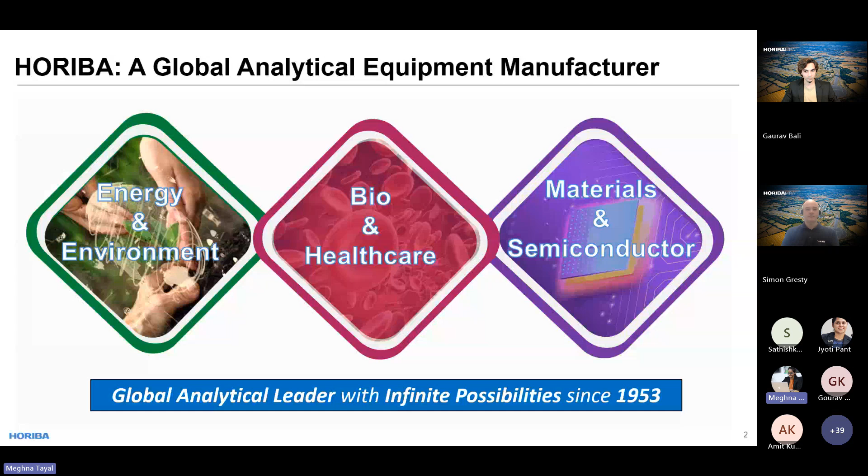The HORIBA Group, a global analytical leader since 1953, serving the markets of energy and environment, bio and healthcare, materials and semiconductor. We are into R&D, manufacturing, sales, and services. Our head office is in Kyoto, Japan, and Atsushi Horiba-san is the current chairman and group CEO.

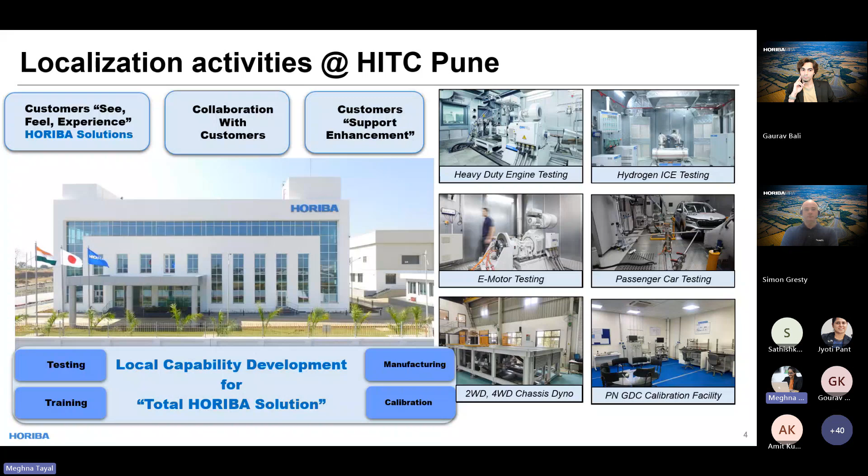Thanks, Meghna. Okay, I'll just start with sharing my screen. Hi everyone, I'm Gaurav. As Meghna said, I'm one of the chief engineers for functional safety at HORIBA MIRA. For the last 15 odd years I've been in the low carbon domain, predominantly vehicle lightweighting, functional safety, and system design. So I'll try and talk to you today about functional safety predominantly.

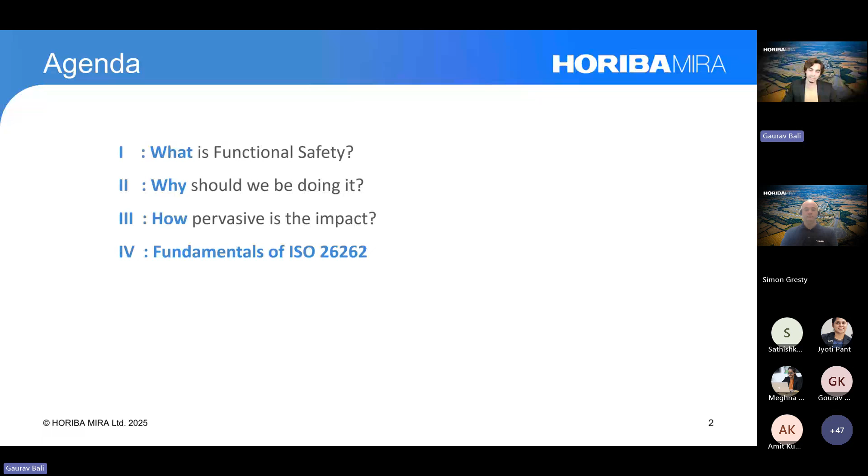So we'll start with what is functional safety, why should we be doing it, and how pervasive is the impact of doing it or potentially not doing it. Then we'll do a little bit of a technical deep dive into some of the basic fundamentals of 26262, which is the leading standard for functional safety. Then we'll try and do a live walkthrough of an example so that you have a technical takeaway from the session as well.

After that, I'll hand over to Simon, who'll talk to you more about our presence, what services we offer, and how we can help your business. Towards the end, we'll be happy to take questions and answers from around the table.

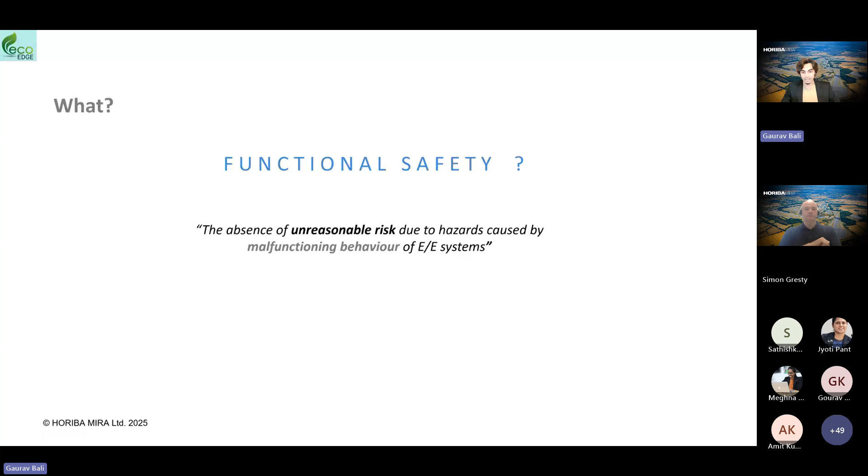So, what is functional safety? The strict or key definition used in the industry is the absence of unreasonable risk due to hazards caused by malfunctioning behaviors of EE systems. Now I know that's a mouthful, but the idea is to highlight unreasonable risk, because risk can never be completely eliminated. The moment we step out of our houses, there is risk. Even within our house, there is risk. Breathing, there is risk.

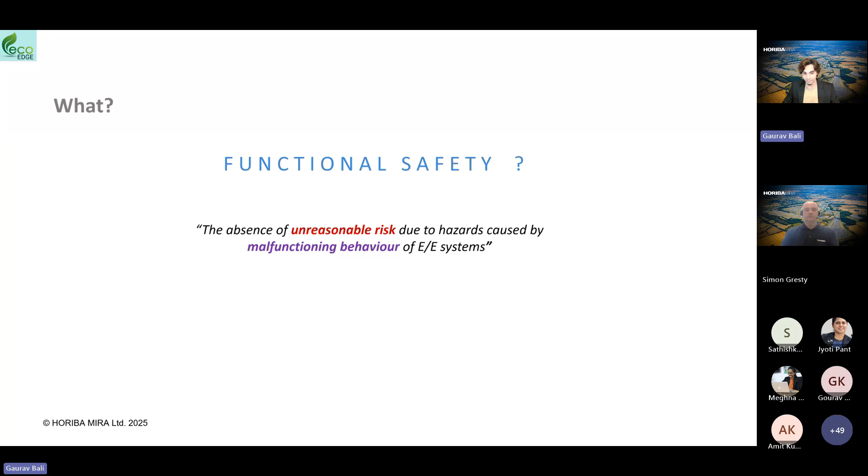So it's the absence of unreasonable risk that we're trying to design against, caused by malfunctioning behavior. What we're trying to highlight is that functional safety's scope is about malfunctions or failures. If the design is just poor, that's not within the scope of functional safety - that's a different standard, a different discipline, called SOTIF, Safety of Intended Functionality. And the scope of 26262 is EE systems.

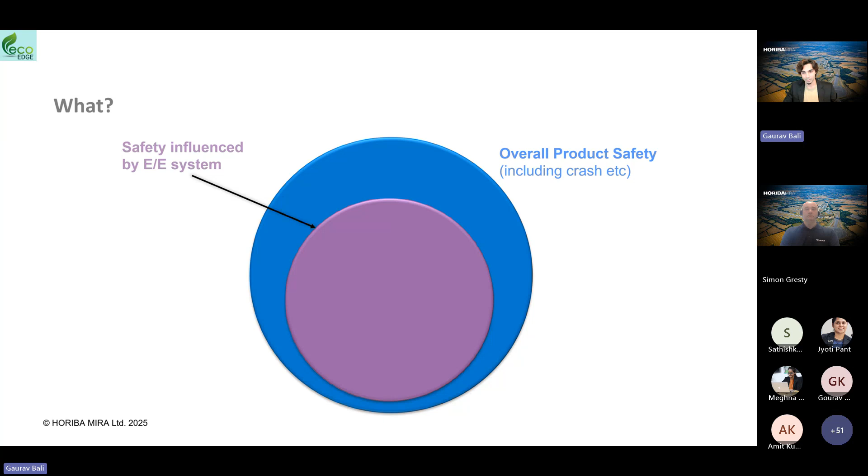So let's look at that a little bit more. If you imagine the overall product safety as this blue circle, it includes everything from crash safety, fire hazards, shocks. We want to highlight that there's a subset influenced by electrical and electronic systems. The blue set is perhaps things like a half shaft breaking - there's no electronic or electrical interaction in that. So that is in the blue circle, but not in the purple - it's outside the scope of 26262.

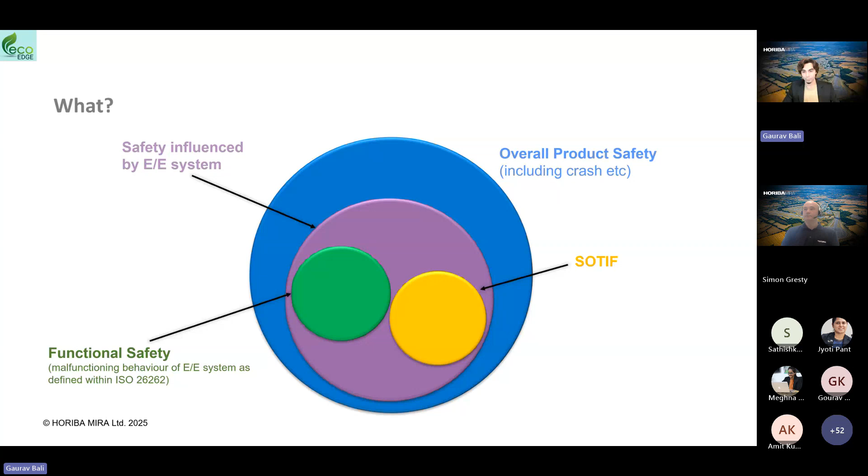Now within this purple circle, which covers all factors associated with electronic and electrical systems, there is a subset which is because of malfunctions. As said, there are poor design choices which could be made, and that's again outside the scope and covered by SOTIF. So functional safety really is a leading discipline, but a subset of your overall product safety. That's important to understand before we jump in.

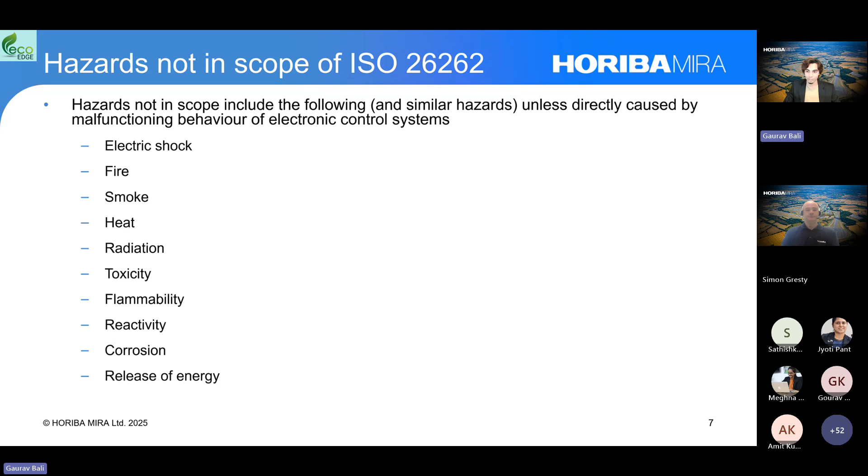So just to recap: things like electric shock, if a conductor is simply exposed, that's poor design - by definition, by design, not being safe - that is not covered by functional safety. If there was an ECU or electronic control system which exposed us to overheating of a component, which then caused fire, that would be within the scope. But a simple fire because of a short circuit, not influenced by an ECU or control system, is again outside the scope. Similarly, there are other technologies and hazards listed here which are outside the scope.

Now let's have a quick look at what the structure of the standard looks like. Many of you may have seen it, some of you may not have seen it. So 26262 edition 2 has 12 parts at the moment.

The first part is the vocabulary, which equips you to understand the various terminologies used through the standard. Part 2 is the overarching umbrella of management of functional safety. It involves things like procedures, safety culture within the organization, the templates you might have to develop for your various parts. So it's about how you manage the overall functional safety.

Then come parts 3 till 7, and this is where the more familiar engineering V cycle kicks in, right? So at the top of the V, we start at a concept phase. We move to the system level in part 4. Part 5 is hardware, part 6 is software, and part 7 comes back up towards commissioning, operation, and decommissioning as well.

Parts 8 till 11 are essentially supporting parts and some informative parts to better implement the principles of functional safety that we would have come across in the first few parts. And then part 12 is a new addition in 2018, to adapt what used to be just for passenger vehicles up to 3,500 kilos. Part 12 now adapts 26262 for motorcycles as well.

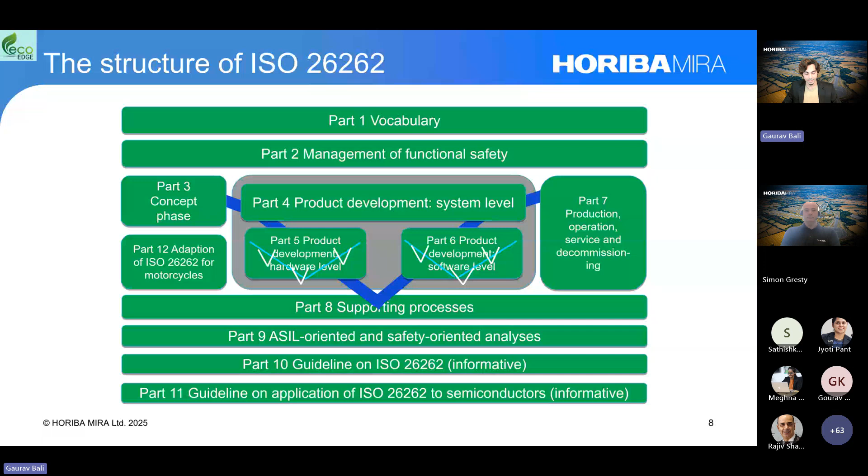26262 has built upon that and expanded a little bit. The first edition came out in 2011. We are currently on edition 2, which came out in 2018. The third edition is expected somewhere around '27 to '28.

If you start today, you would probably have edition 3 coming in, and you could update your design cycles to include principles of edition 3 as well. So it's a great time to start.

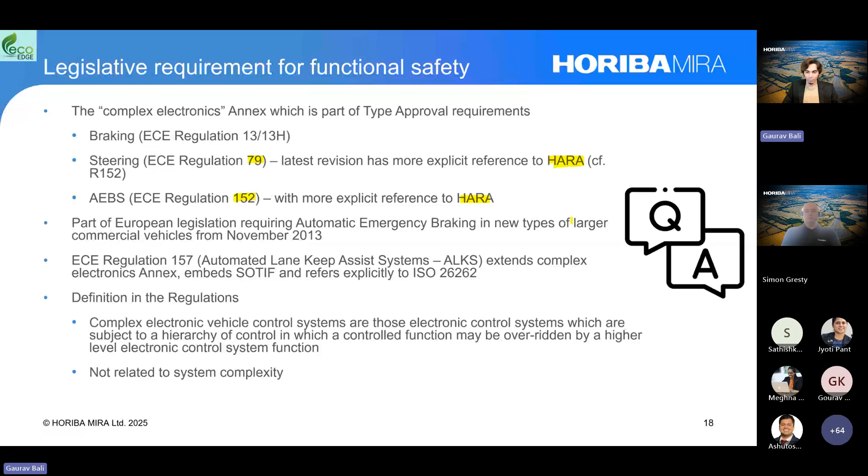So the next part of this seminar is, we've introduced functional safety. The next part is to give you a bit of a technical slice of what it is like to do functional safety and what the foundations of 26262 are.

Gaurav, just a quick interruption, sorry. The slides, I think, are lagging again. Some other people are facing the same thing. Yeah. Okay, I'll just go slower then.

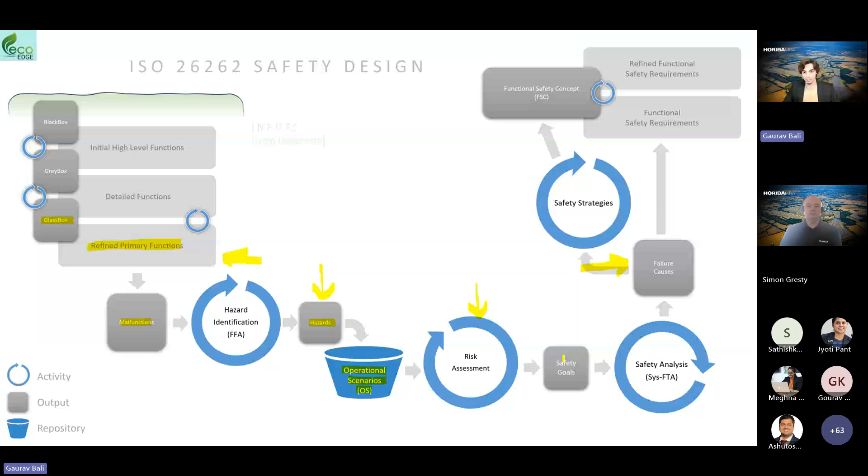The first is a set of inputs, which is covered by the item definition. The second is the problem space that is analyzed by the HARA, as well as safety analyses like fault tree analysis or the more familiar FMEAs. And then the final stage is the solution space, where we try to take all the failure causes we've identified and write requirements and come up with safety strategies to address or mitigate them.

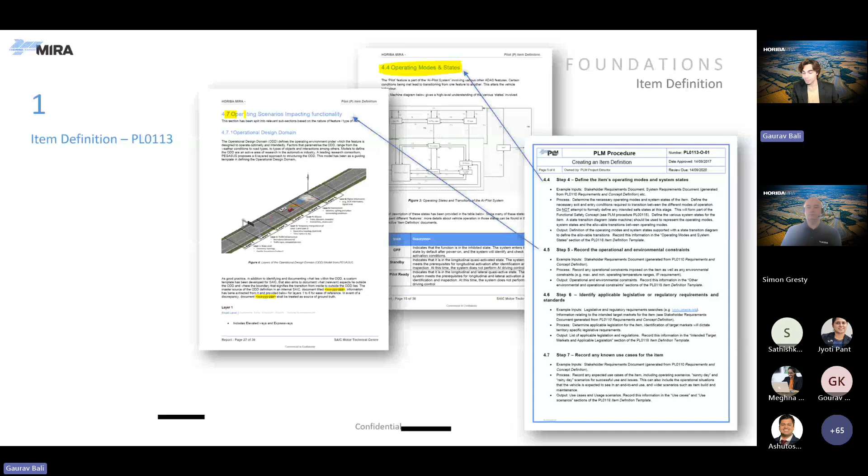And this is very important for high autonomy features or ADAS features. You want to capture the operational design domain, which essentially says where your feature operates. If you have a traffic jam assist, does it operate on the highway? Does it operate inside a city only? Does it operate in rain? And so on. The next is what the intended target market is.

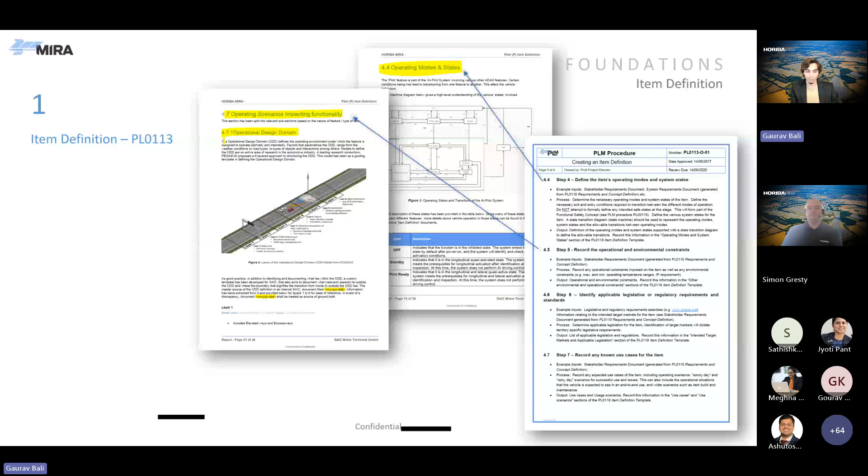Are there any legislative requirements and applicable standards in addition to 26262? And then what usage scenarios you consider. Carrying that on, it also gives you an opportunity to capture key assumptions.

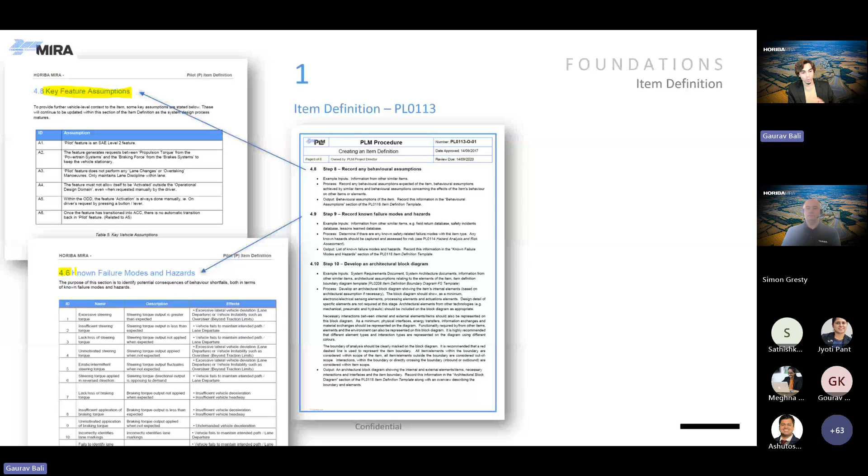Even though we are going to do a full risk analysis as the next step, it gives you an opportunity to capture the knowledge that exists from previous projects in the form of known failure modes and hazards. Perhaps the most important aspects of the item definition are to capture an item boundary and come up with your core or primary functions. Let's look at that in more detail.

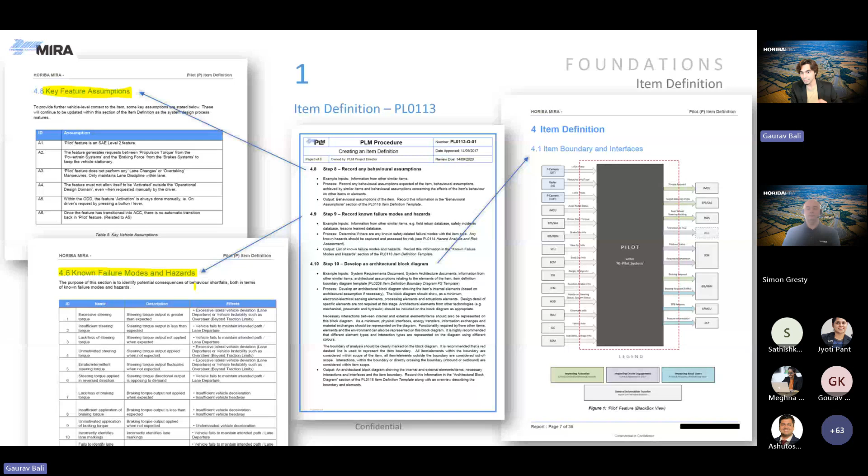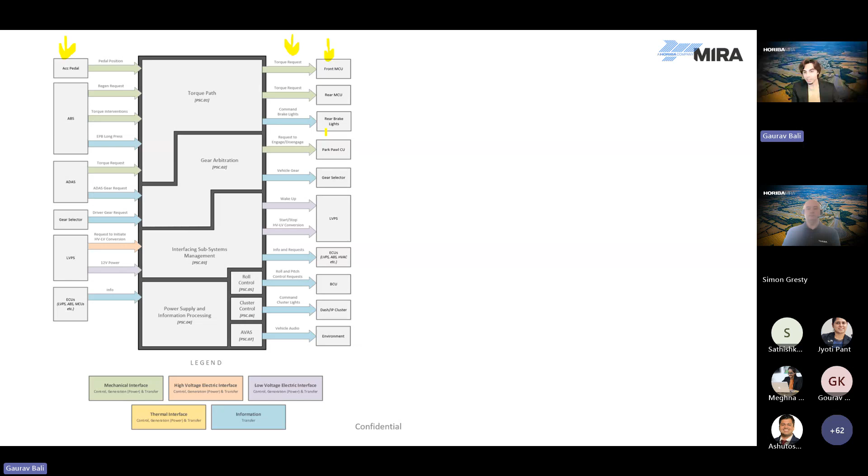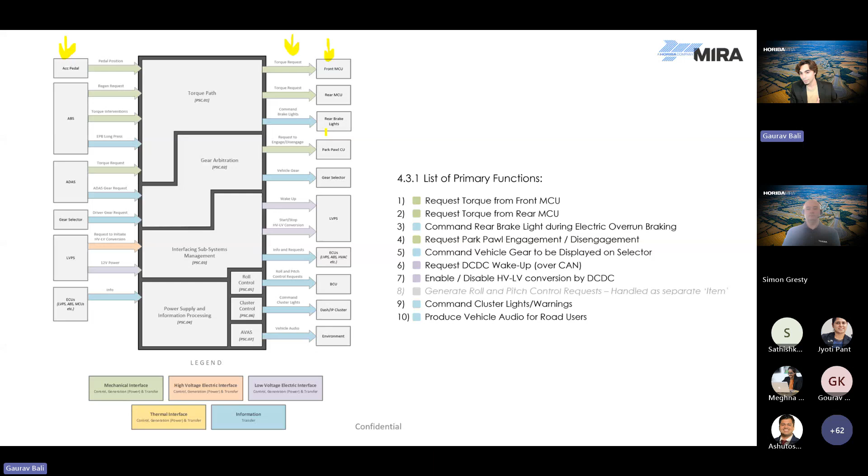This would be what a black box item boundary would look like in your item definition. It essentially tries to capture the systems or ECUs that you take inputs from, and as your system, it captures what outputs and functions you send to the rest of the vehicle in terms of the ECUs and systems you interact with. You can also have a glass box view to capture the functional blocks that live within your item boundary. Finally, you want to come up with a list of your key, core, or primary functions for your system. This is the key input into your HARA.

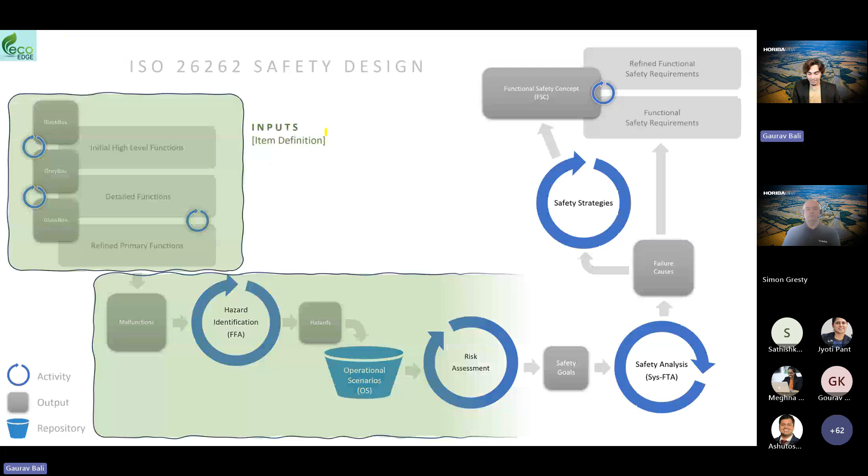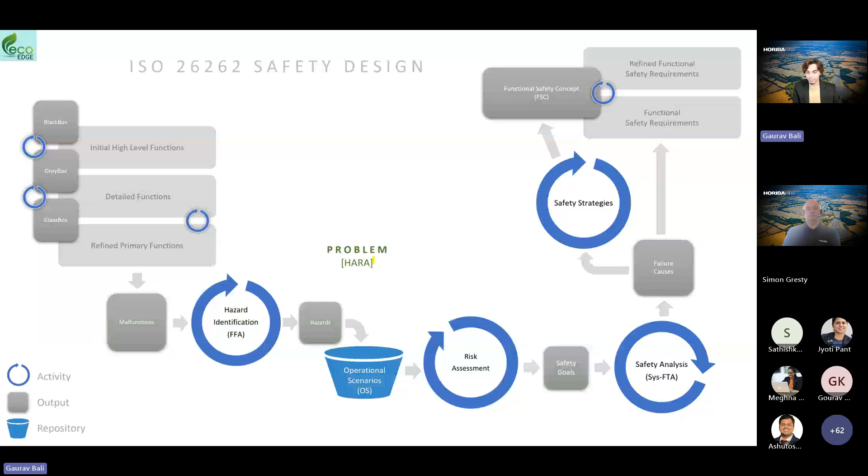The next thing we look at is the hazard analysis and risk assessment. This is the problem space, as we said. We've looked at the inputs; the problem space is the HARA. We break that down into two steps. The first is a functional failure analysis, so we'll look at what this is in a minute. Then the second step is essentially doing the risk assessment.

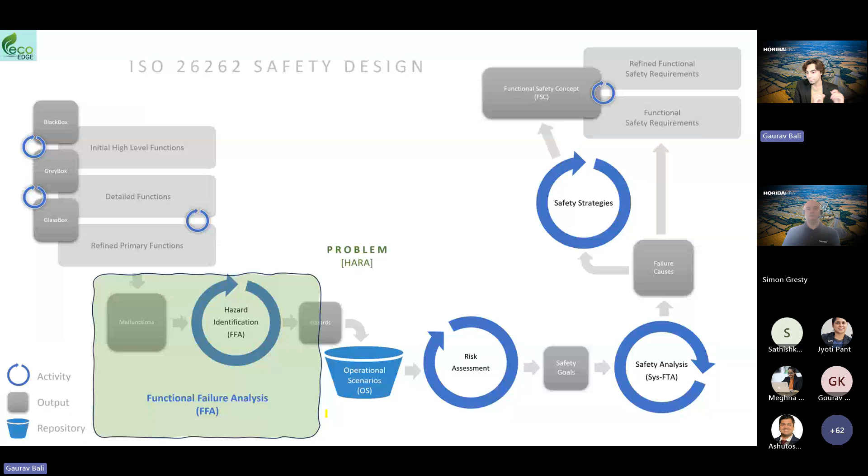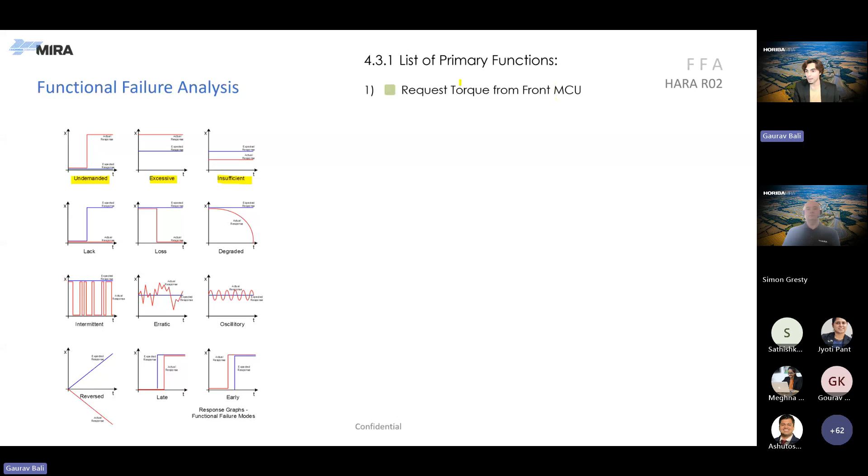The FFA, the functional failure analysis, takes our primary function, each of our primary functions, and considers them against a certain set of guide words. So for every primary function, like request torque from the front motor control unit, we might consider a guide word like undemanded. If you have undemanded torque from the front motor control unit, you would end up with undemanded acceleration. That is your hazard at the top.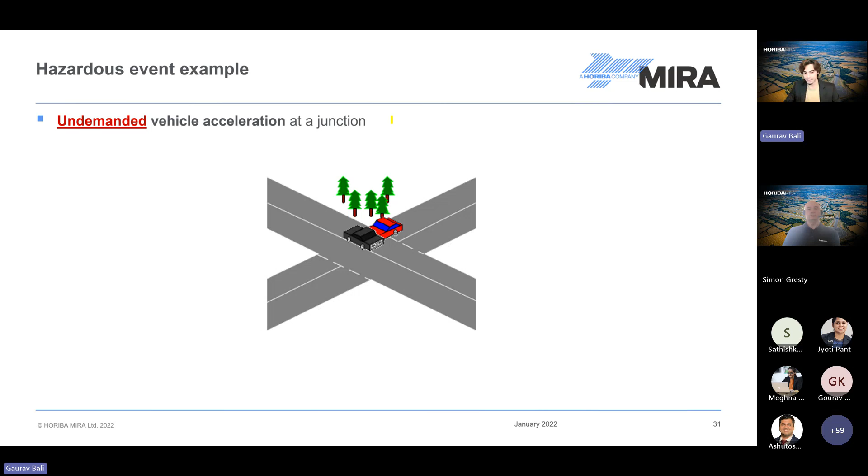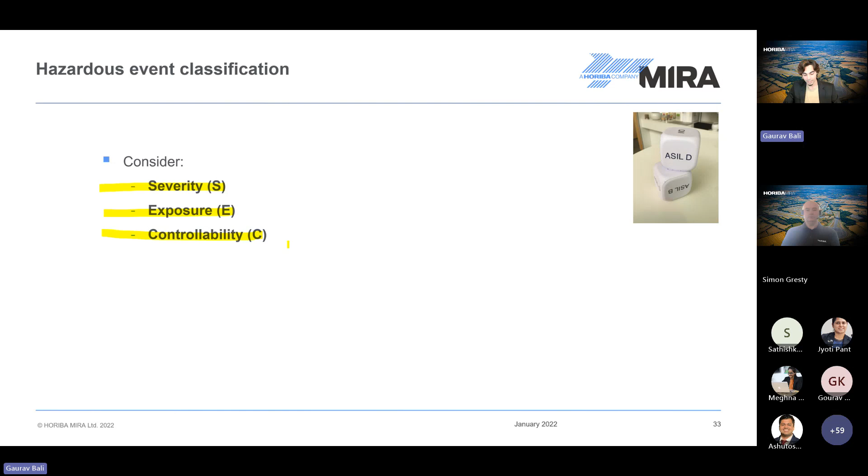What the risk assessment considers, as we said briefly in the past, is the severity of this sequence of events. It looks at the exposure - how often we would find ourselves in this scenario - and the controllability available to us, in terms of the driver being able to brake, steer, or take other actions. It also accounts for controllability of other road users. In the accident we just saw, the ego vehicle's driver could have hit the brakes, and the driver of the cross traffic could have seen the ego vehicle lurching forward and tried to hit the brakes. So it takes the net controllability of all the actors in the scenario.

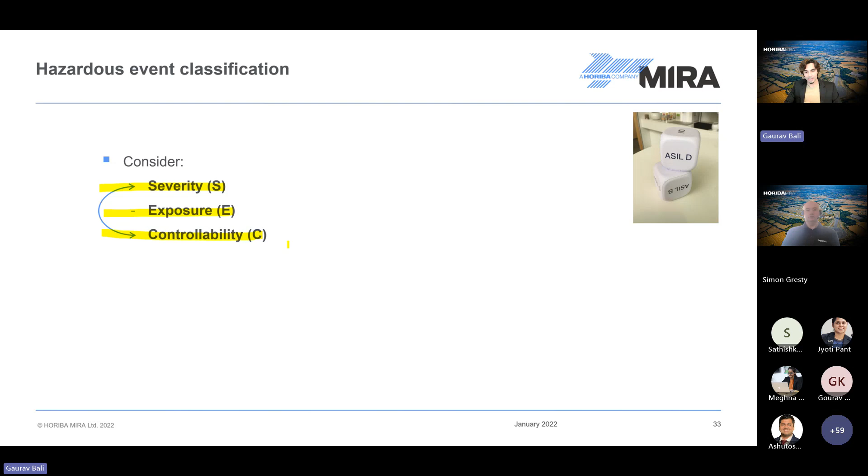So to start with, let's look at the interaction between severity and controllability - this is a live example we'll walk through. But before that, a little understanding of severity: it's essentially graded on a scale of criticality. If there are no injuries, we call it S0, the least critical. Then comes S1, light injuries, always defined by a greater than 10% probability of a certain type of injury. S1 is greater than 10% probability of light injuries. S2 is greater than 10% probability of severe injuries, but survival is probable. S3 is greater than 10% probability of severe injuries which are critical and likely fatal, so survival is improbable. So ranging from no harm, to light injuries, to survival probable, to survival improbable is how we grade severity.

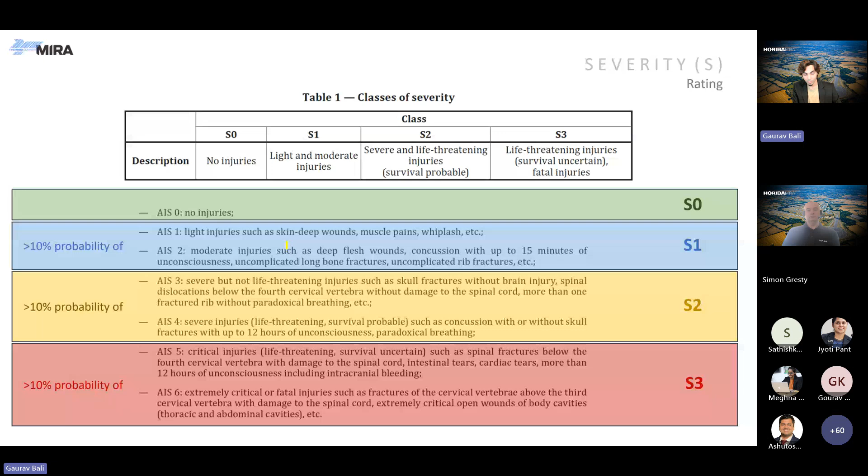Controllability has a similar set of gradations. C0 is your normal braking for the vehicle in front of you. C1 is something almost everybody is able to do - greater than 99% of average drivers are able to avoid harm. C2 is between 90 and 99%. C3 is anything less than 90%, where we don't take controllability credit.

Just a quick note, could you hold on to that controllability slide, because the slides haven't changed - they're still showing severity at the moment. Oh, okay, yeah, let me know when it changes. Okay.

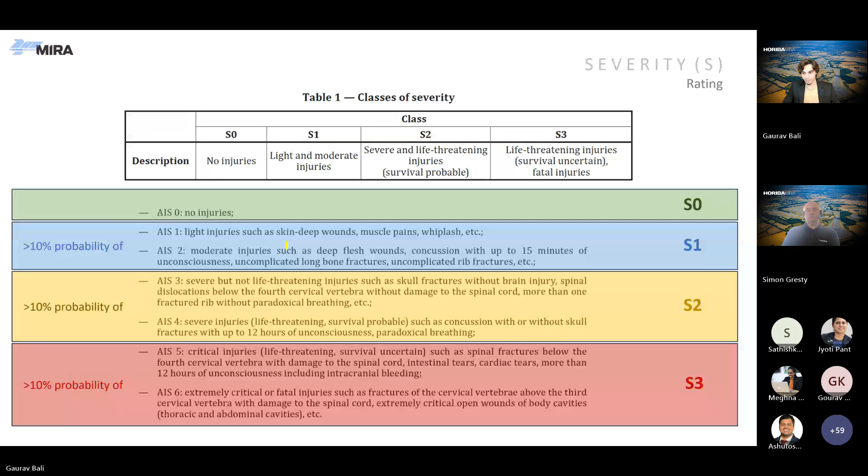Could you try switching slides a little bit? It's still showing severity on my side. Doesn't seem to be helping. Okay, now it's changed to controllability finally. Go on, thanks, sorry about that guys.

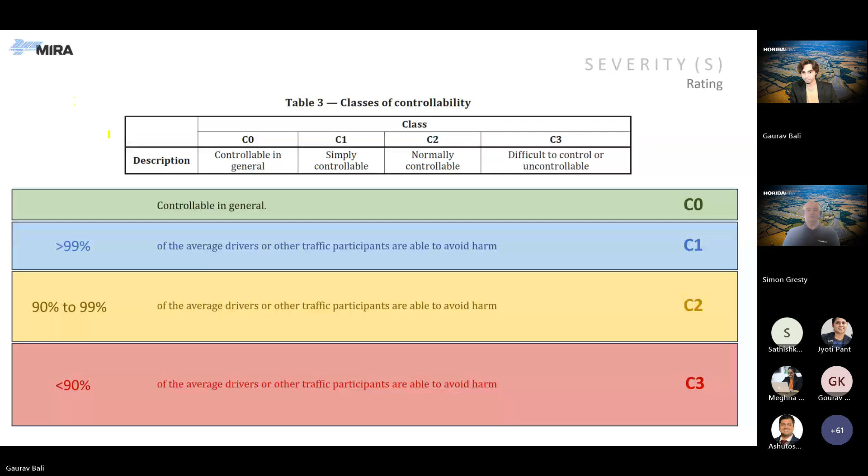Controllability is graded in the same way as severity. Severity is S0 to S3. Controllability is C0 to C3. Now let's look at an example.

For undemanded deceleration, we were talking about acceleration so far. Let's look at undemanded deceleration. There are different ways to do it. One way to do the HARA is purely qualitative. The other way is sometimes to augment a little bit of calculations and add that quantitative backing to the assessments we are making.

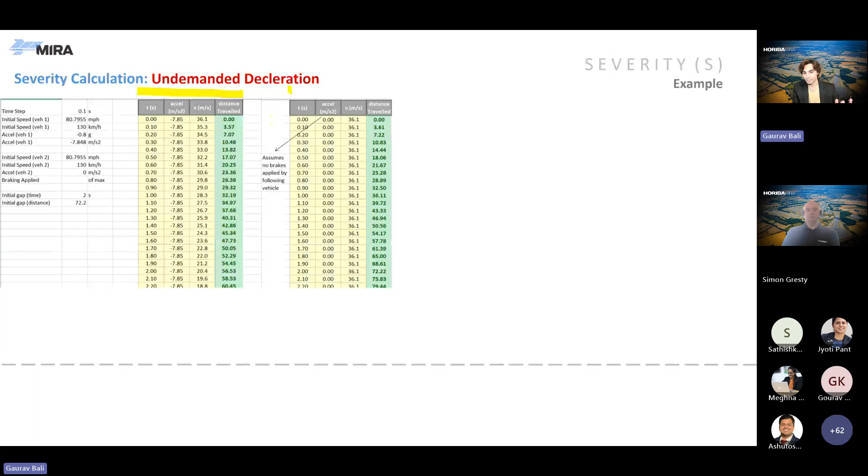The hazard that we have considered is undemanded deceleration. And this is maximum deceleration of the vehicle. For most passenger cars, this is around 0.8 G.

So what we want to understand is how the sequence of events plays out. And because this is a severity calculation, we do not take any credit for the vehicle behind us being able to react to us having a decel fault and braking. So there is no deceleration expected from the vehicle behind us. And this is one of the key things: severity is considered independently, then we tack on controllability and we consider them together.

So without any controllability actions taken into account, this hazard would lead to a crash 4.3 seconds later with a closing speed of about 33.75 meters per second. What that equates to is about 120 kilometers per hour, or 75 miles an hour.

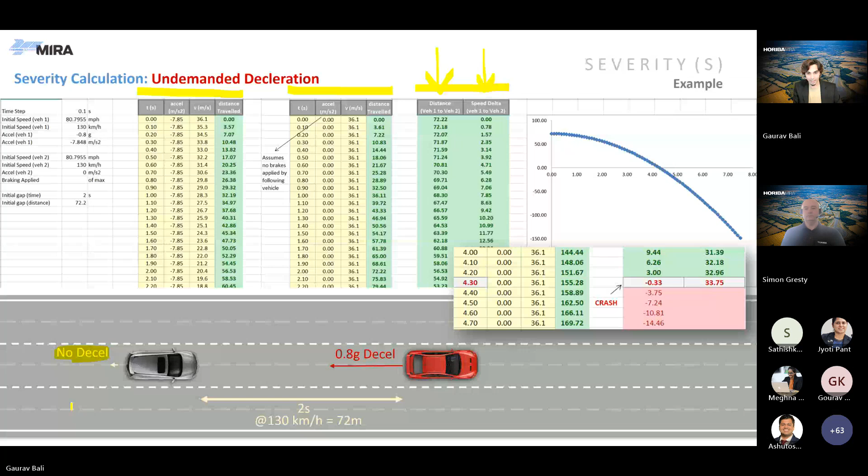But based on research we've performed, most of the time people apply about 80% of the braking that is actually required in that scenario. This is a fair assumption of how realistically things play out in the real world, and we try and do testing for that. So if we had 99th percentile people applying brakes 1.65 seconds later, does that prevent a collision or not?

This graph shows the distance between the two vehicles. The moment it reaches 0, that means the two vehicles have made contact. So 99% of the people, their reaction time is not sufficient to avoid this collision.

Let's try and test for C2. The threshold for that is 90% of people, and the reaction time is a little faster—instead of 1.65, we have 1.3 seconds before the brakes are applied. Running the same calculation, we find the distance between the two vehicles does not become 0. They come to a stationary stop before contact, so we can conclude that 90% of people would be able to avoid this accident. So for controllability, we rate C2.

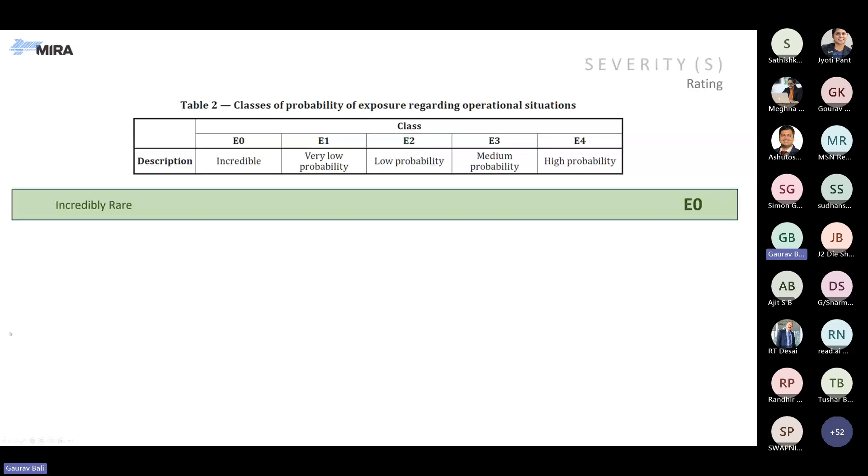Let's look at the ratings first. E0 is incredibly rare and doesn't even have a quantified probability. E1 is any scenario we might experience less than once a year—for example, if you're broken down by the side of the road, that's an E1 event, because you're not expected to break down regularly, more than once a year.

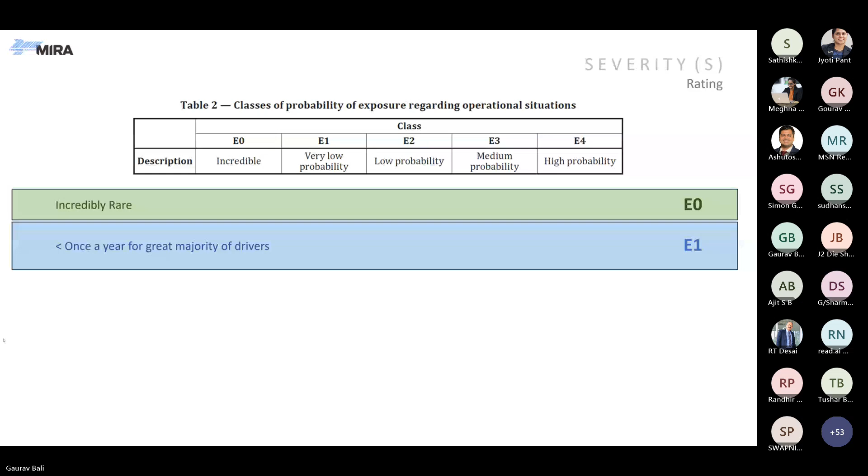E2 is a few times a year for the great majority of drivers, or less than 1% of the time you're driving. What you might experience more than once a month, every few days, or on average less than 10% of driving time, is E3.

The interesting part about exposure is that while severity and controllability had only 4 classes, exposure has 5. There's an E4 as well—almost every drive, something experienced by an average driver, like overtaking, waiting at a junction, or hitting the brakes. In terms of duration, anything experienced for more than 10% of your drive cycle, like driving on the expressway or motorway, is a perfect example of E4.

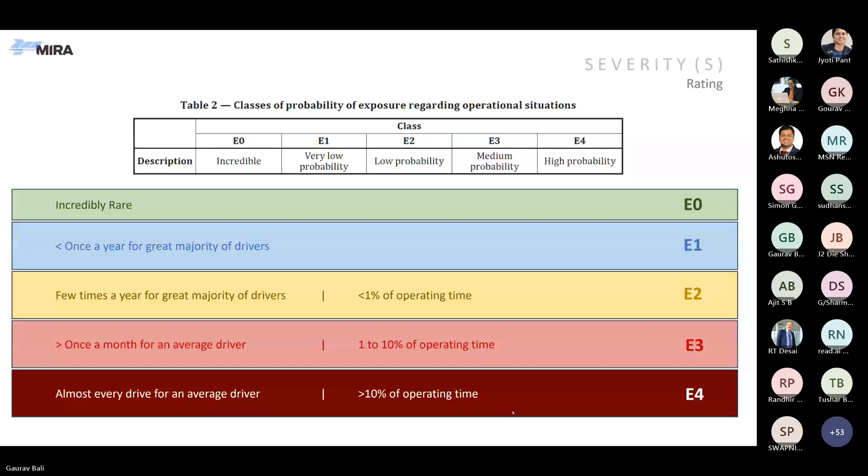Which leads us to conclude that our particular example, where we were decelerating, is an E4 scenario, because it could happen on any highway or high-speed road condition. So we end up with S3, C2, and E4 for this scenario of undemanded deceleration on a highway.

All of this we are trying to rate so we can get to the automotive safety integrity level, ASIL, using the table available in 26262. With S3, we're on the rightmost column; C2 reduces that window to the middle; and E4 brings us to ASIL C. So this particular hazardous event would have an integrity of ASIL C.

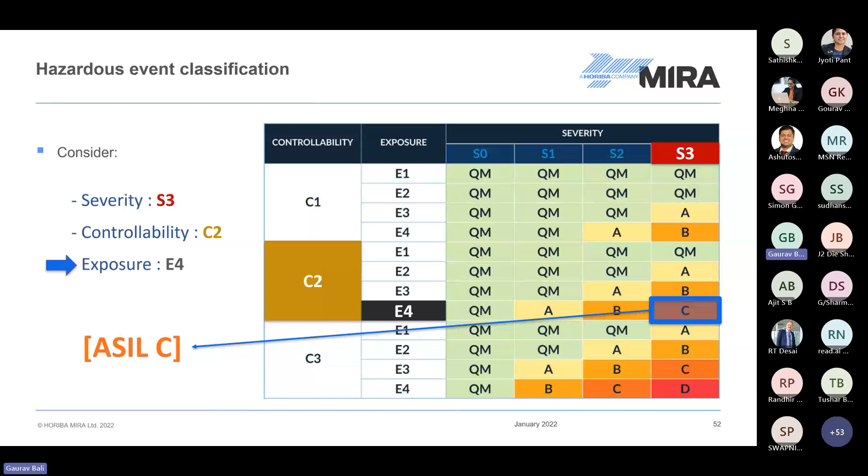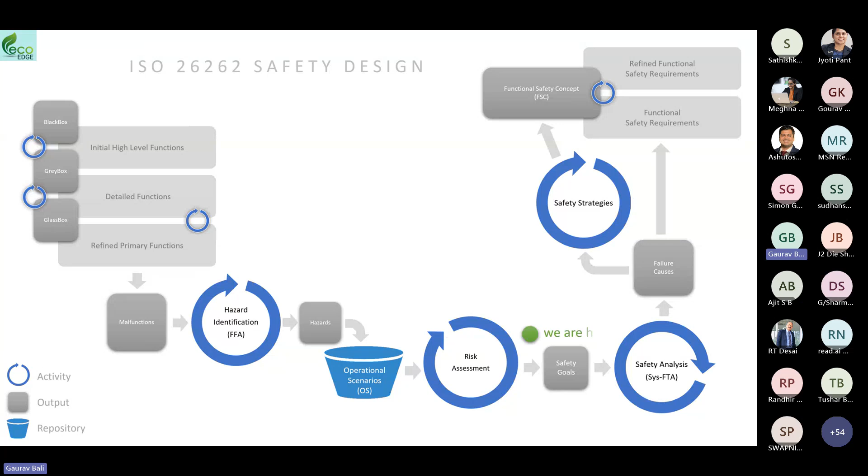Now, just to recap: at the start of the session we tried to understand where we begin with functional safety—it's a combination of an item boundary and defining our functions. We came up with an example function of request torque from the front motor control unit, then applied some malfunctions. If we were requesting braking torque and the malfunction was undemanded, the hazard would be undemanded deceleration. We considered that hazard in an operational scenario of everyday driving on a highway at about 100 to 150 kilometers per hour, then performed a risk assessment looking at severity, controllability, and exposure to arrive at the ASIL rating.